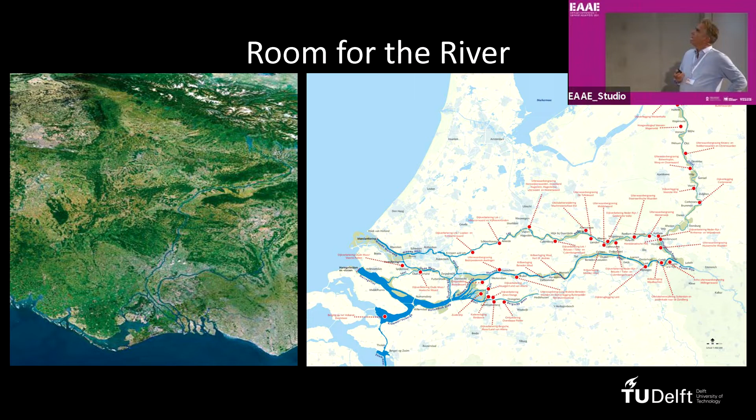Until 20 years ago, we believed that with the continuous reinforcement of river dikes, we would be able to keep the water out of parts of the country that should not be inundated. But we also kept thinking about how we could add more strategies than just keeping up these dikes. So a program started called Room for the River, which carefully selected specific sub-locations and regions in the river system to see to what extent the river section could be extended.

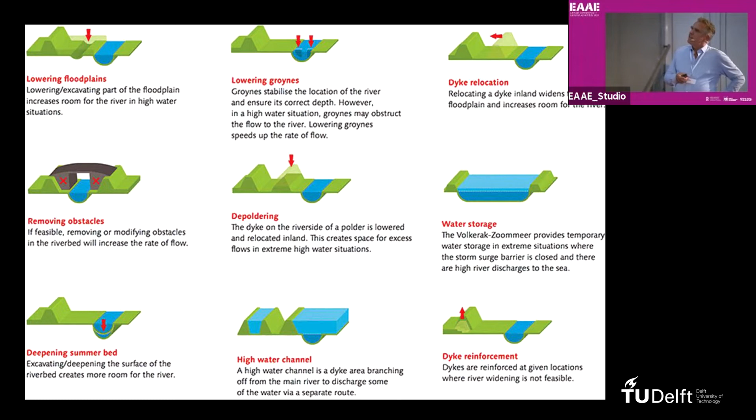So what had to be done? Well, this is a summary or an inventory of all the measures, you might call them river civil engineering or hydrological civil engineering measures, that were to be taken. Many times combinations of these different strategies were designed and operationalized. And here you see some examples of what actually happened.

Does this thing have a pointer as well? I think it does, yeah.

So these are two different areas. You see the meandering IJssel River, which runs north and ends in the IJssel Lake. And here, the extension of the river section. So this was the part that was already available for controlled inundation between these two dikes. It was decided that this dike should be replaced in this place and the other one as well.

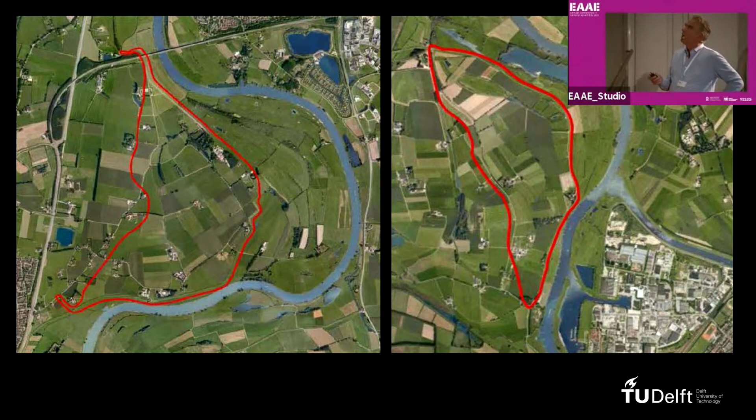So this is the original dike and it had to be relocated over here. You can imagine that it meant that this section, which until today remains an agricultural area, had to be reconfigured. And here you see in 4 slides the effect.

This is the original situation in one of those 2 projects. Here you see, if you look close, the existing dike, which runs here and goes here, and then takes the meander up to here. And here you see the new dike, which of course, in a sense, is a landscape architectural challenge to design a new river dike.

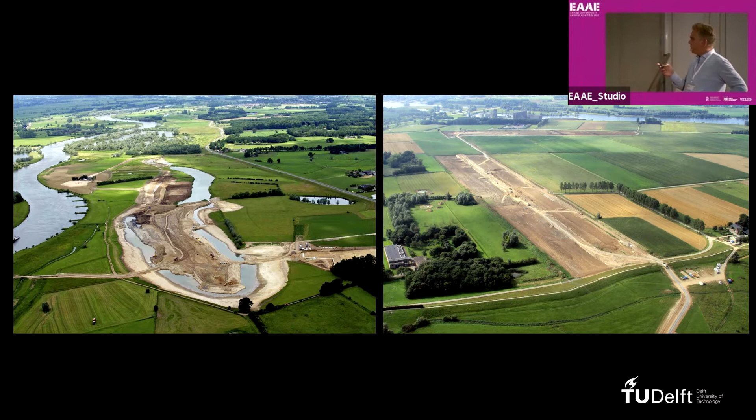Other measures, like for example, excavating parts of the flooding areas to allow more water to be stored, is on the left-hand side. And on the right-hand side, the construction of a new, also very wide and broad dike to allow water to come in this area.

Here you see the city of Nijmegen, close to the German border, where the river Waal was rather narrow, which caused quite some damage every once in a while in the Nijmegen inner city. And it was decided to take this dike up, relocate it here, and have a small island in the river here and allow the river to flood in this section.

Other types of new landscape elements had to be constructed, and before they could be constructed, they had to be designed. You can imagine that. So here's another example. This is more downstream, in which a large area was made available for controlled inundation by, sorry, can I go back? Yeah, I can go back. By allowing water coming from here to go under this line.

So there were 4 entries created to allow the water to come in and inundate parts of this formerly completely agricultural area. And as you can see, there are 3 sort of levels of controlled inundation possible. And just recently, with the high waters of a month ago, this complete area was inundated. So it works, actually. The whole program is finalized. It's been constructed and delivered and cost about 2.3 billion euros, spread out in over 30 to 40 different projects.

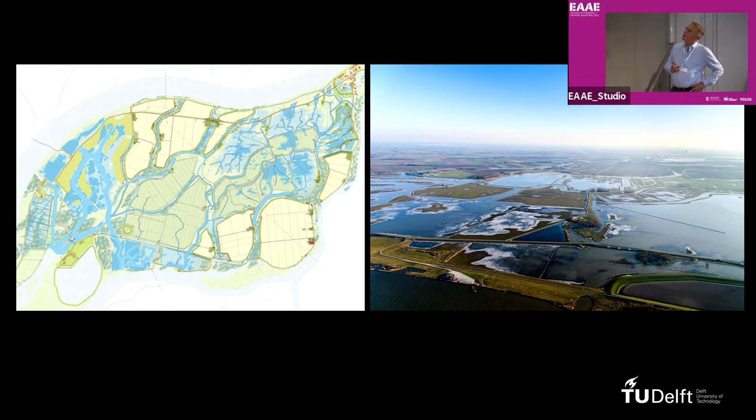Also, many different landscape architects who took up different projects to be designed. My role was as chairman of the quality team to see that all these projects would in one way or another be familiar to each other, because we were intervening in one river system.

This is the second project. This is the new Dutch water defense line. I was having a summer holiday in Italy last month, and the news reached me that UNESCO decided that this whole system now should be on the World Heritage List. So after 20 years of hard work, it actually is now a world monument. And this is how we found it in 2001. A large series of fortresses, more or less inaccessible, left to themselves.

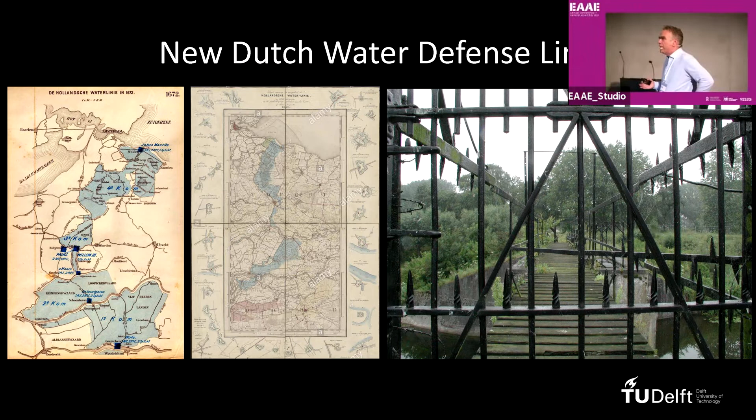But of course, with the invention of airplanes, this whole system suddenly became obsolete and an unnecessary relic from the past. This is why it is here.

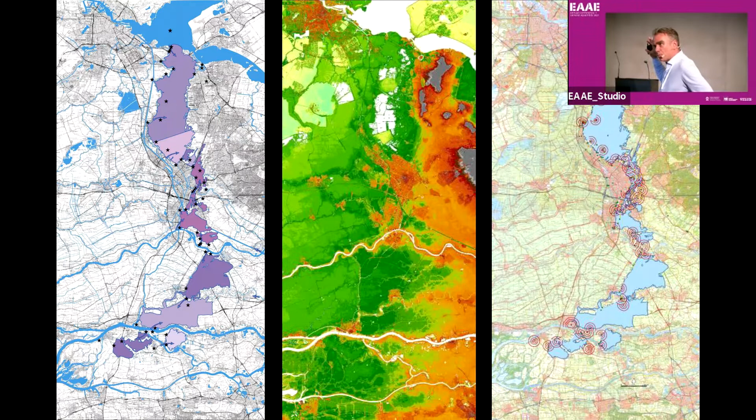In the middle, you see, it just sort of defines the subtle transition between higher and lower grounds, as we call them in Holland. It needs the professional eye to actually see the difference, but in terms of water management, it is a relevant gradient.

On the left-hand side, you see the different basins, so the water management decision areas, and with the black stars, there are the fortresses on this map, where inundation would not work, and other types of military defense works had to be introduced to be able to keep the enemy out. And in this case, the enemy was expected to come from the east, as you can imagine.

So here you see the projection of the old megastructure. This is about 120 kilometers in length and various width on the 2001 topography. And you see here a diagonal between Amsterdam, Utrecht, and Den Bosch, with all sorts of major infrastructure going through, meaning that this area would also be continuously in a high spatial dynamic, so to speak.

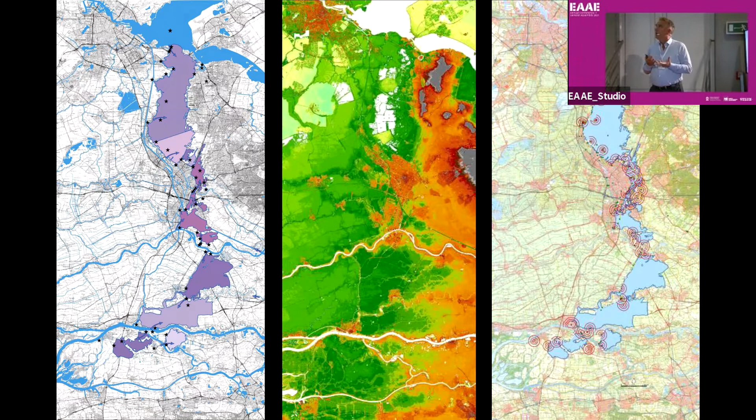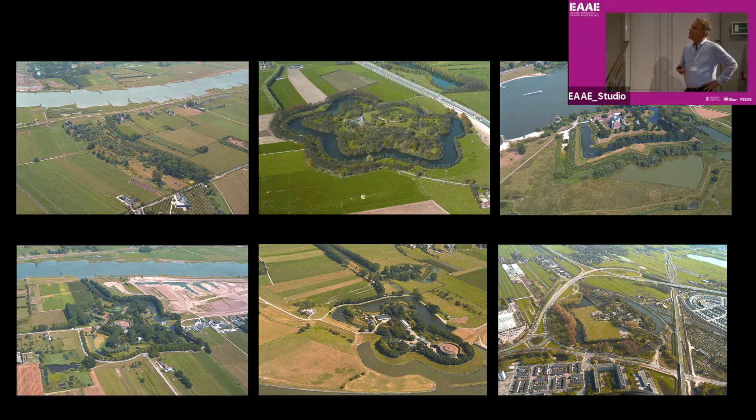So the question here was, how can we revitalize this heritage system and conserve it and restore it, and at the same time redirect all this urban pressure and agricultural pressure? And we decided to come up with a strategy which said we will allow spatial dynamics, but in a way that it brings this beautiful historical system further to expression. That's basically, in a nutshell, the way we approach this.

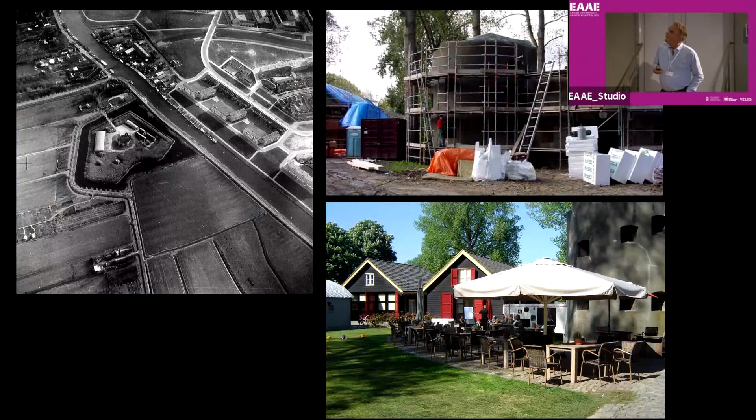Here you see some relics of the Dutch defense line, and of course, immediately it's the fortresses, the built artifacts that attract the attention, but basically the essential part of this whole system was controlled inundation. Some examples, just briefly, to see what happened to these fortresses. They were sometimes still owned by the Ministry of Defense, sometimes by municipalities. This is a collection of about 40 fortresses, all different. 2 or 3 of them were privatized and inhabited.

And this is an example of a fortress near Utrecht that was adopted by the municipality and revitalized by an entrepreneur who started a bar and a restaurant and a sleeping place there. Here's another example, also near Utrecht, the north. These black and white photographs, by the way, were taken by the British Royal Air Force in the last year of the Second World War, to be sure about the way the whole country was susceptible to defense by the occupying forces.

And the irony of the Dutch water defense line is that it was actually never used to stop enemies coming in, but it was used by the German troops in 1945 to stop Allied troops coming to the west of the country. Nevertheless, it's a beautiful story. It also explains why a lot of these artifacts are still intact. They were never used in a military context. Here you see additions to this old fort, and the revenues that came out of these additions allowed the whole fortress to be restored. So a beautiful combination of efforts.

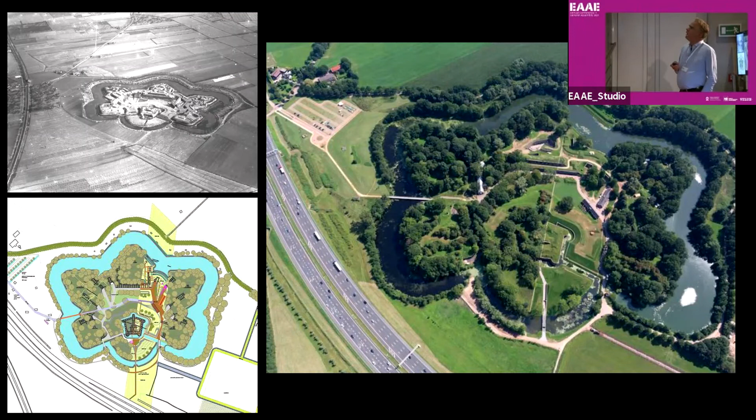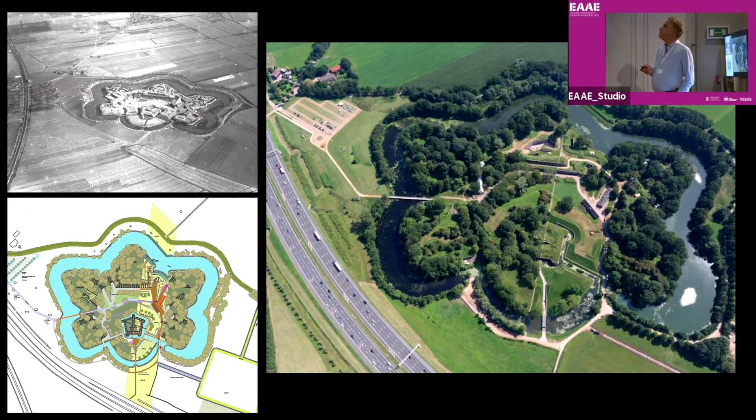Here's another example, a major fortress in the heart of the whole system, aligned by Highway A2, which goes through the country. And here you see the intervention designed by landscape architects West 8 from Rotterdam, who decided that this overgrown situation would profit from an 80 meters wide haircut that allowed a partial restoration, allowing the major part to be more or less intact, and a new part that referred to the former part. Beautiful project, and implemented in a very precise way.

And of course, there's also waterworks. As I said, the essence of this whole system was controlled inundation, and all the artifacts that were necessary to have this done were also taken up in this program, partly restored, partly reused, and partly also reinterpreted. Here you see two water retention areas that allow for water storage when heavy rainfall is to be stored. And of course, controlled inundation is also a new responsibility for all these water management organizations that the country has. So it's controlled inundation 21st century.

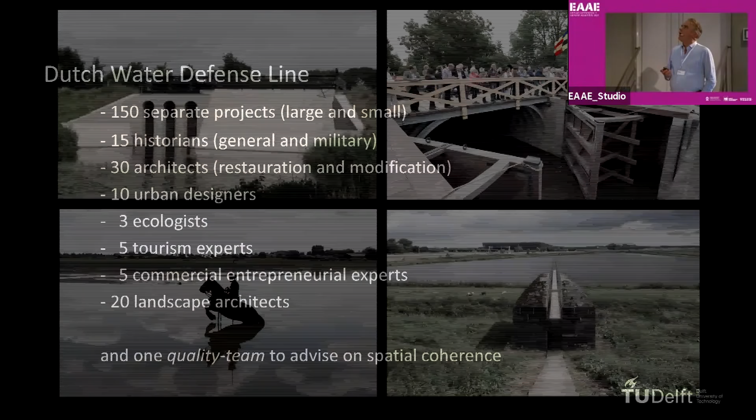Okay, so summarizing the Dutch water defense line experience: many different projects, many different historians, both general historians as well as military historians who had a specific idea about the value and the significance of this whole system. Many designers, many architects as well, who were involved in the delicate additions and modifications on these fortresses, which at that time were already a national monument as a whole. The whole collection was considered a national monument.

But also entrepreneurial experts who were giving advice on the commercial, economical potential of parts of the Dutch defense line, and many landscape architects. And again, one quality team to safeguard the internal and external coherence and consistency of all the work. And I was able to also be a member and later chair this quality team.

So beautiful work, large scale projects, publicly financed, many different actors, both on a governmental level as well as on the more public and private level. Many years of preparation and execution, and all more or less continuously supervised by a team of different design and other expertise.

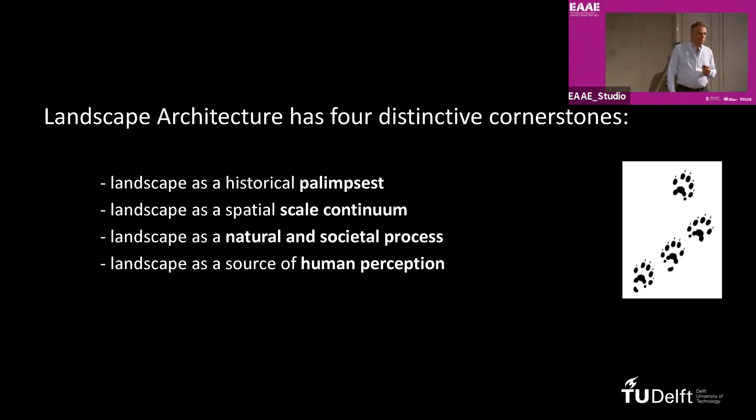So all those four components are in our curriculum. This might be good as an input for the debate later, because if you take those four components seriously, this is how it relates to other disciplines that are taught in this university and in my university in Delft. So I'm not going to read them all out. If you want, we can elaborate on this in the debate.

And then to finalize my contribution of this afternoon, this is how we actually teach our students. We're a young track. We exist 10 years now. We just celebrated, under all the COVID restrictions and impediments that we are facing, our 10 years anniversary last year. We're producing a book now on 10 years of landscape architectural education, which will be launched on the 2nd of December.

We are very happy that we have been selected as one of the 8 best schools of landscape architecture through the Barcelona Biennale, which is a 2-yearly landscape architectural event. So at the end of September, there will be a presentation on our school with the other 7 finalists, and then the jury will decide who will be the utmost best. Of course, we're already happy that within a period of 10 years, we made it to the last 8.

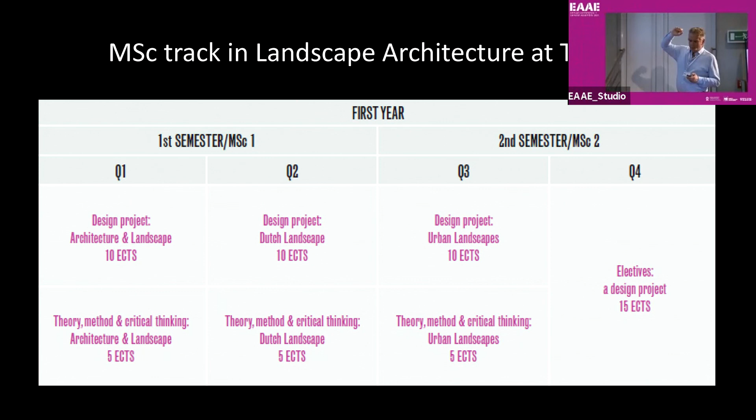I was very happy to see also that the School of Milan is one of the finalists as well, from the landscape architecture section, which is even a younger section. So we have strong competition. Anyway, I'm not going to explain all this. What you should take with you is this is the first year and this is the second year, and it's all about landscape architecture. We allow ourselves to be a full-blown landscape architectural master track. So no fuzziness, no architecture here, no urban design here. Let's first focus on the disciplinary responsibilities, our common repertoire, ways of dealing and doing with landscape.

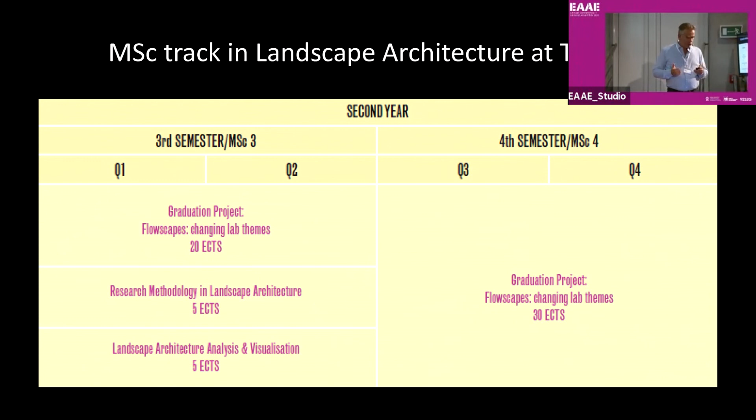And we have many international students now. The number is growing fast, actually. As you could see, it's a program which is divided in 2 years. The first year is in 4 quarters, so rather intensive, 10-week design studios aligned by theoretical and methodological input. The 4th quarter in the first year is a free course in which we offer our students to go outside and build something, construct something. And there's beautiful examples of that. And the 2nd year is rather extensive time for your personal development in a graduation project, aligned by methodological and mapping skills. So that's in a nutshell what we offer our students.